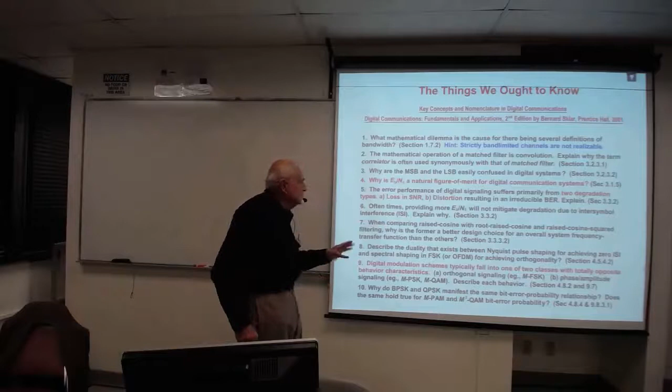Why is it that EB over N0 is a natural figure of merit for digital communication systems? Usually we talk signal-to-noise ratio. What's this EB over N0? Notice that the error performance of digital signaling falls into two clear degradation classifications. There's either some kind of noise that's going to reduce the signal-to-noise ratio, or there's going to be distortion. That's all you have to worry about, those two.

What about digital modulation schemes? Again, notice how many things fall into two compartments. There's either orthogonal signaling, an example would be M-ary FSK, or the one we're going to be talking about today, which is OFDM, or there's phase amplitude signaling. That's all there is — that's the whole bag of signaling in digital communications. And that's the sort of questions we've come up with.

Where in the system is EB over N0 located? Describe trade-off types. What about the Shannon limit — is it something we can actually achieve? There are two phases to error correcting coding: one is good, one is bad. Describe subtle energy and rate transformations — we're going to be doing that today.

As you go through all of these, down through 70, what I've come to the conclusion is that being familiar with these items on this 6-page checklist will, in my opinion, put you on the road to success in this chosen field, which I think is a fantastic, amazing field to be in. Therefore, I offer this to you as a tool to calibrate yourself.

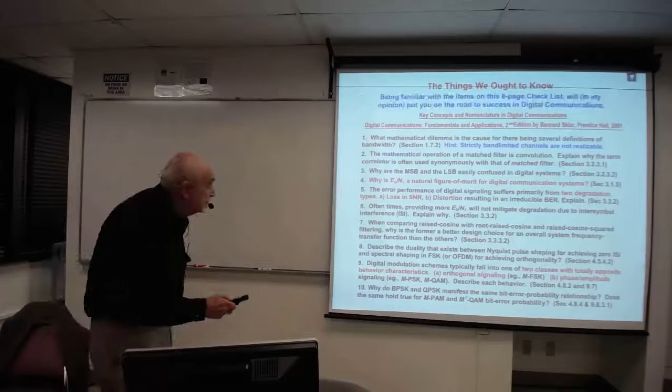Take these 6 pages, and I feel confident that if you're ever going to go on an interview for a job or such, if you can answer all of those 70 questions and are familiar with those concepts — notice that after each one I generally put a section coming out of my textbook wherein you'll find more information. Sometimes there's a reference to a paper, but most of the time there's just a reference to the notes themselves.

So again, I think it's important for you to have such a tool. Imagine me promising you that if you go through these 70 items, taking 2 or 3 per day so it wouldn't take too long, and make sure you understand every subtlety and explanation about every statement in there, you're going to know an awful lot, a wide swath of information across the board. You'll be relatively prepared to answer what any interviewer — at least these are the ones I came up with as an interviewer over several years — might ask. So I offer it to you.

Now, the first 4 parts — remember we went through many of these fundamentals: the big picture, why digital, Nyquist and Shannon, what do they teach us, bandwidth efficiency, bandwidth limited and power limited systems, turbo and LDPC codes, and so forth — and fading channels was the last important area, and a lot of what we're doing today depends on understanding fading channels. We'll remind you a little bit as we go on. But part 5 is on OFDM and single carrier OFDM.

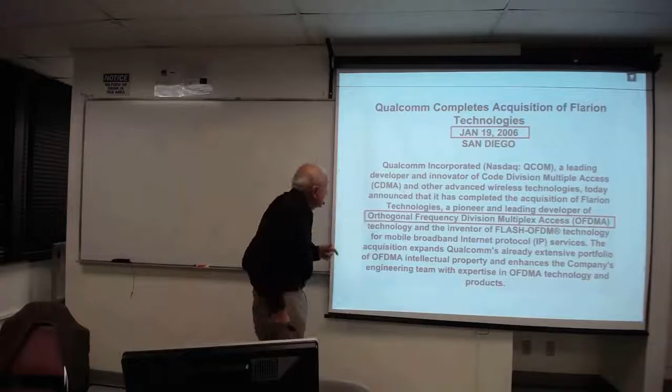Well, what made me so excited about OFDM a dozen years ago was this newspaper clipping from just about 12 years ago, when it was announced in San Diego that Qualcomm Corporation had just purchased a company called Flarion. Qualcomm basically invented CDMA in IS-95. They came up with the basic direct sequence type of modulation, which is used today all over America as the primary spread spectrum technique for mitigating against fading multipath channels.

And I thought that was wonderful, a very clever idea, the rake receiver. So if Andy Viterbi, the head of Qualcomm, went out and bought another company simply because they had a handle on orthogonal frequency division multiplexing and multiple access, then I figured this has got to be very important - and indeed it was.

For those of you who think this just came about a dozen years ago, that's not true at all. Notice that the history goes back to 1957 when Kineplex came along - these 19-inch rack-mounted panels. I want you to note that even though Kineplex was born in 1957, it was a method for sharing the channel's bandwidth. It was not a process to invert the bad effects of the channel as we use it today.

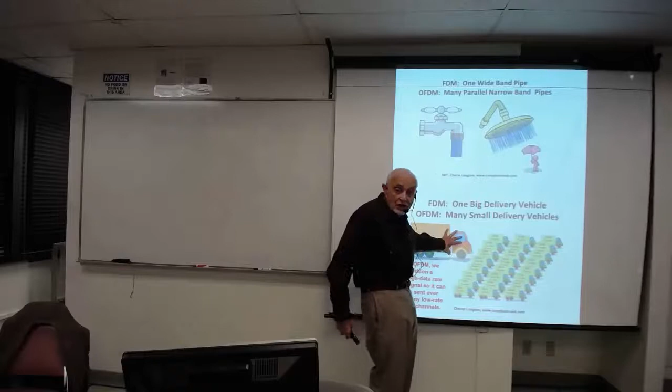You see the whole idea of the shotgun approach, as it is in OFDM or OFDMA: we're going to partition a high data rate signal so it can be sent over many low rate channels. The whole idea is if you do encounter some kind of accident along the route, and if it were one large truck, the whole cargo would go down or be delayed. Here it's just 1 or 2 or 3 - and that's why we have error correction coding.

Anyway, when you take a look at single carrier systems, if you have a wideband signal, notice you have very short symbol times - short symbols equals large bandwidth. The moment you go to a conventional multi-carrier system - this is not OFDM, this is just anybody sharing the bandwidth by giving different segments to different channels of different users - what you have are longer symbols. You're sending things out slower, a much longer time, because each transmission represents a lesser amount of bandwidth, so it's slower.

The whole beauty of OFDM, compared to a conventional system, is that in a conventional system you've got to have some spacing, some guard bands between users so they don't interfere with one another. But the O in OFDM is what gives us the magic of being able to squeeze them together so tightly, with a 50% overlap and a factor of 2 improvement immediately without doing anything else, just by insisting that they are orthogonal to one another.

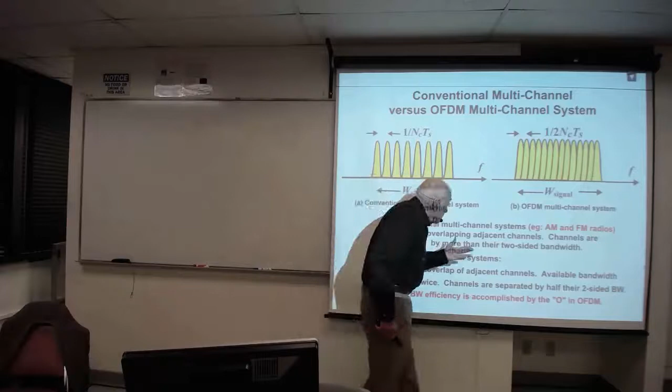So one might ask: why don't we take ordinary radio, like AM and FM, and instead of doing it this way, overlap the channels to get twice as much spectrum capability? The answer is that the simplest way to assure orthogonality of adjacent sinusoids is to have all the sinusoids have an integer number of cycles per fixed interval and constant amplitudes over that interval. That's very difficult to do in a wideband system. These are simple rules to follow when you've got low bandwidth, or just a subcarrier with a tiny bandwidth. We can follow these rules and make this happen, but it can't happen that easily in a wideband system.

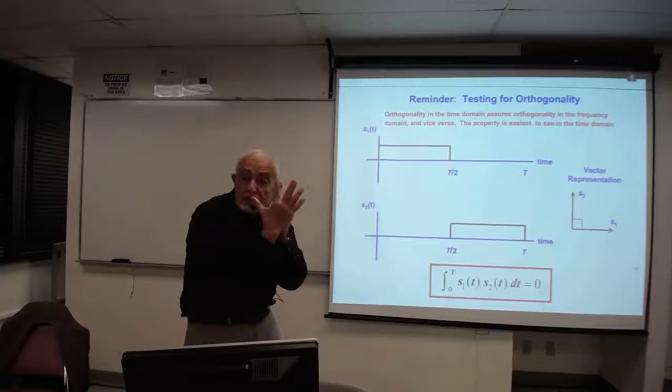This is a reminder of how we test for orthogonality. We can do it either in the time domain or the frequency domain. It's easier to see with signal 1 and signal 2. What does it mean for them to be orthogonal to one another? They can't possibly interfere with each other - they don't exist in the same time or space. Seen as vectors, they're mutually perpendicular, so there's no crosstalk - a projection of one vector upon another is zero. Mathematically, we look at the inner product averaged out over a time interval, or the correlation. You take S1 and S2, put them one on top of the other, multiply them, and average out the result - it should average to 0. That's our test.

So if I ask you: I have two tones, 10,000 hertz and 12,000 hertz - are they orthogonal to one another? If you tried to answer, you'd be incorrect even trying, because the thing you've got to know immediately is how fast you are signaling. Just saying 10,000 hertz and 12,000 hertz describes how many cycles there are in the interval. But in order for them to be orthogonal, the spacing has to be equal to the speed at which they're being delivered.

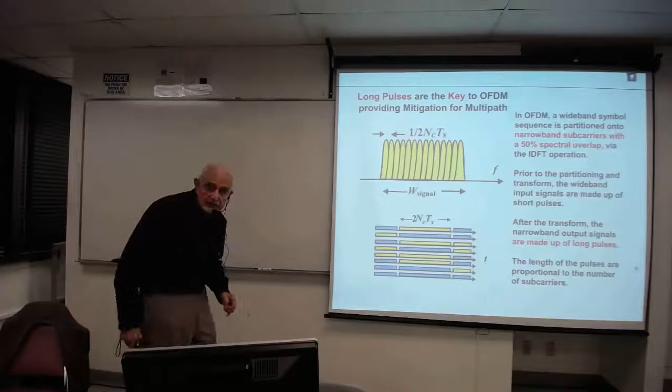Remember, this is an important point: long pulses are the key to OFDM. When we take a large bandwidth signal and partition it into lots of little subbands, we're lengthening the pulses of each one - that's the key to what we're doing. For ordinary conventional multi-channel systems, there's a bit of spacing between channels for safety. Here, there's a 50% overlap, which gives us a factor of 2 improvement in bandwidth efficiency. I can basically squeeze everything down to half and get the same bits per second as in the conventional system.

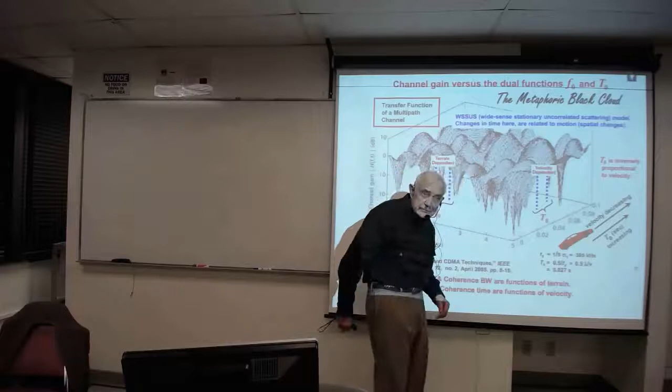You might remember what I called the metaphor of the black cloud in any fading channel - when a vehicle or pedestrian is moving along in a fading wireless communication system, they're always surrounded by this kind of overview, where the channel gain represents the quality of the channel. You get severe ups and downs in quality, and the two important characteristics we went over last time are the coherence bandwidth and the coherence time. Basically, it's not rocket science - you see the region where this thing goes up and comes down.

This region in frequency is the region of spectral lines, and signals having spectral lines in this region are going to be treated at the receiver in a highly coherent way. Let me just go over this one more time.

For f sub 0, the coherence bandwidth was this. Well, let's move on, because I have slides that describe it. But keep in mind that in a fading channel, these are two important characteristics: coherence bandwidth and coherence time.

What we're doing here is we've got a situation where the channel quality is going to suffer some ups and downs. It's not rocket science, but the region where it's up for a fair amount of time is basically telling you how much time appears to be such that the signal is being received in a coherent, reliable way.

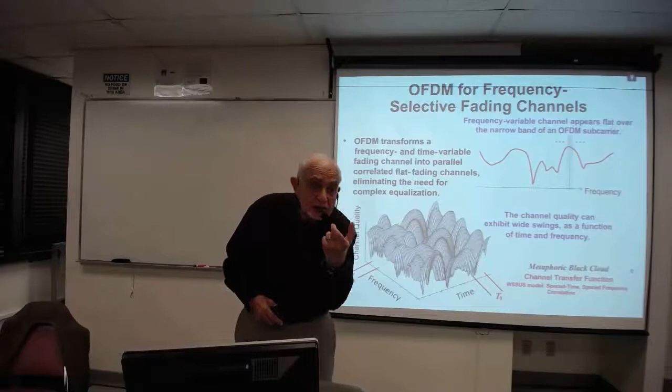And the f sub 0, similarly, when you get the same sort of region going this way in the frequency domain, you're asking the same question: what is the size, the chunk size, of the spectral region that is either fading or not fading, but behaving in a like manner—a coherent manner means a like manner.

And notice, essentially what we're going to be doing in OFDM is we're taking a slice and looking in this direction. What we're seeing is that any one of those slices is going to have an amplitude value, a quality value of that channel, which can be thought of as approximately flat.

You wouldn't think of it as flat because of this large excursion it's going through, but when we're taking little sub-channels in there, it is flat. That's why we often use the same picture that came out of the MIMO section that says it fits nicely into our assumed MIMO channel model: narrow band flat fading channels where received phasors can be described with complex value gain factors.

By the way, I think this picture also leads us to see what we're gaining with OFDM. We've got some fairly complicated transforms—that is, they look complicated to the human eye. Actually, it turns out to be the simplest mathematical way of doing these narrow band flat systems.

But what does it buy us? What is it buying us? Here's where you can see what you're buying. Look what you want to do when you say the word equalize.

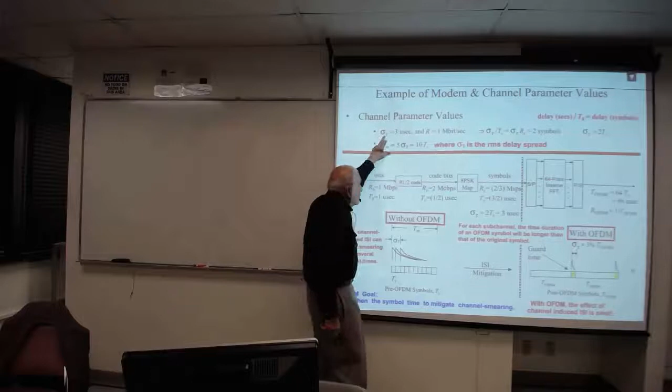Okay, so if you take a look at a modem, what we call sigma sub tau is known as the RMS delay spread, given in microseconds—3 microseconds here. Notice how easy it is to change that delay in terms of symbols: if I simply divide the RMS delay spread by the symbol time, or multiply by the rate, since sigma sub tau is in seconds and the rate is symbols per second, the seconds cancel out and I'm left with symbols. In this example, 3 microseconds is the same as 2 symbols.

Here is an example, as you see in the title, of the effect of lengthening the symbol time. That's what OFDM is all about. Without OFDM, let me walk you through an ordinary example: 1 megabit per second, and the symbol time is 1 microsecond.

You got a rate 1/2 code. You got an 8-PSK. You got symbols coming out of here, which is 1.5 microseconds, and you got this kind of RMS delay spread. So in some averaging sense, the sigma sub tau is 3 microseconds, or 2 symbols.

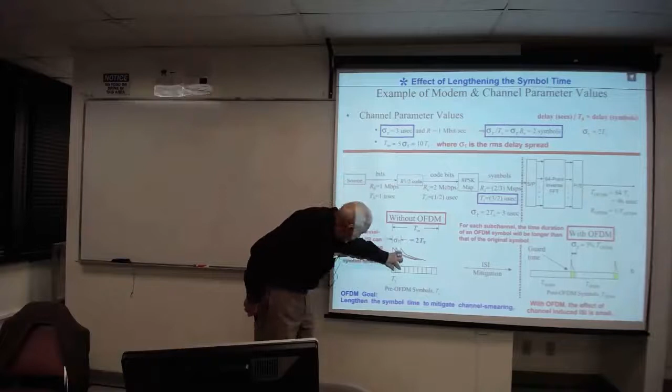And you can see here what we mean by 2 symbols. It means that in some RMS fashion, not the maximum value, because the maximum value would take you out here, but in some RMS fashion, this is about how you affect the received sequence of symbols, 2 of them.

But look at what happens once you go into an OFDM. With OFDM, when you have lengthened, that's the whole idea, you've lengthened the symbols. They're no longer this, but you got the same environment, you got the same multipath environment, so you got the same sigma sub tau, and lo and behold, this is the bottom line of what we're trying to show you.

With the lengthened symbols, the same sigma sub tau that without OFDM would have hit 2 of the symbols is only hitting 3% of 1 of the symbols.

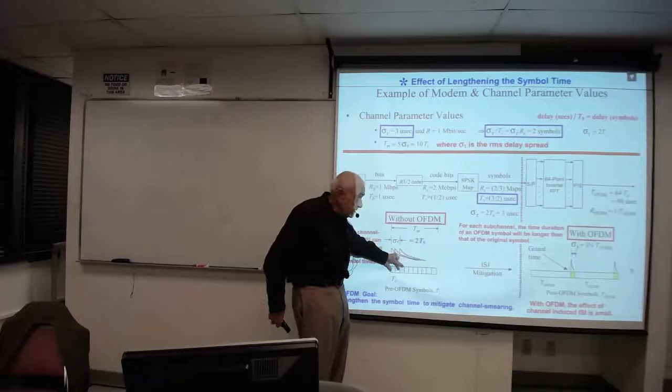So the whole idea is to just get an appreciation of this. This is almost like a wipeout, or a very difficult equalization, in a non-OFDM case. And here you just got, listen, the worst case is just leave a space, and you've already fixed that problem. So this is the big picture about how OFDM and its lengthening helps us out.

So I do want to say a little bit more about the coherence bandwidth and the coherence time, and its relationship to the RMS delay spread.

Notice there are 2 researchers. A very early one is a very famous researcher in cellular telephony, W.C.Y. Lee. His publication in 1989 gave rise to what we call a coherence bandwidth, which is called a 90% coherence bandwidth, and it's very restrictive. But Rappaport came up with a less restrictive one called 50%, and that's the one you see here.

So to get an understanding of what this means, and this is where we're focusing our attention, but if you don't happen to remember what the coherence bandwidth is all about, let me show you that. First of all, our picture is from the Proakis textbook, where we're looking at 1, 2, 3, 4 correlation functions.

This is called the spaced frequency correlation function, and what that really means is when you take, you're looking for the effect of the channel on the spacing delta F.

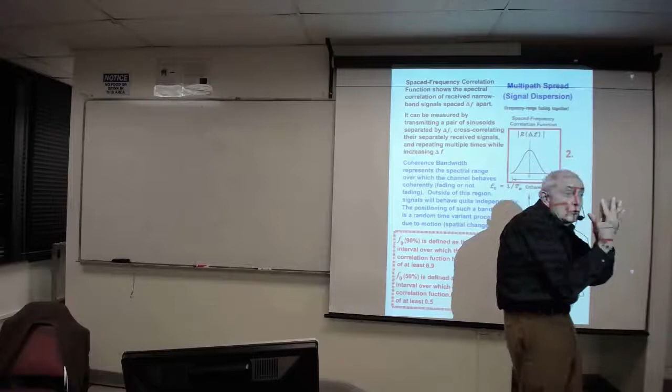And Mr. Lee said, you know, to get an important coherence bandwidth, you ought to use 0.9 or 90% as the metric. And Rappaport says that's a little too restrictive. Let's use 0.5, and let's call that correlated. So his coherence bandwidth is dependent on a less rigid correlation.

So again, you're saying, look, if there is zero difference in delta F between the two tones, you get the peak value. When delta F goes a little bit positive or a little bit negative, you get a reduced value. A little bit more, and it's reduced still more, and so forth. And so you see, as you're separating in frequency, 1,000 versus 5,000 hertz, 1,000 versus 10,000 hertz, 1,000 versus 20,000 hertz, that's how you plot that curve.

And of course, this happens to be the Fourier transform of what we call a multipath spread. And that's probably what you're used to thinking about the moment you hear multipath, is you get fingers of return that are echoes that are delayed. And these two are Fourier transforms of one another. And of course, we're focusing our attention right here on F sub 0, and I've just explained what that means.

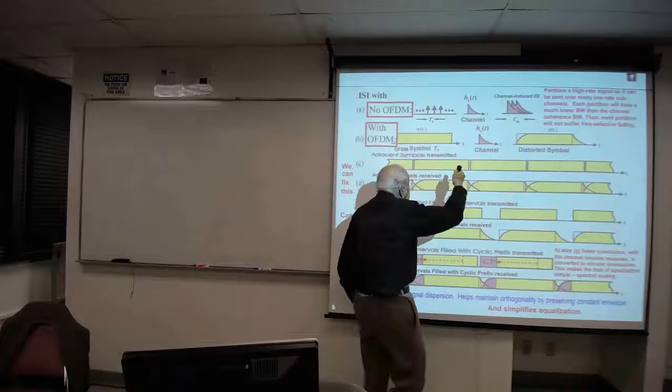So on this slide, what you see is, let's take a case of the kind of inter-symbol interference you're going to get with no OFDM and with OFDM. So if you have no OFDM and you just have symbols coming along, which I'm showing as impulses right here, the impulse response of the channel is hurtful.

I mean, it's something that is going to smear. That is, every time you're making a transmission, you're convolving it with this response, and sending out three impulses at the receiver looks like this. And of course, the receiver doesn't know the anatomy of all this.

It just gets the superposition of all that value, which is a smear. Smearing is hurtful. But notice with OFDM, the whole idea is that instead of having all these smeared signals run on top of each other, you do get a distorted symbol. There's a rise time here and a fall time here.

But we can fix that, and notice how simple it is to fix. We just take the transmissions of these - remember, these are longer pulses now. That's what we're buying with OFDM: longer pulses, with a little space or zero space between them.

But look at how we fix it. We just separate them with a guard band, and you see that the distorted part falls in the guard band, and we have just fixed the inter-symbol interference.

But we're going to go further than that. We introduce what is called a cyclic prefix, and that fixes things further. I don't have to fix the inter-symbol interference any further than that - once I've opened it up so they don't sit on each other, it's gone.

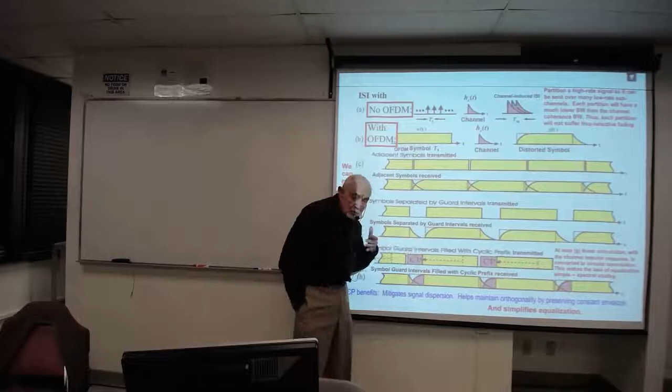The cyclic prefix really doesn't do much for the inter-symbol interference, but we're going to show you how much it does for maintaining orthogonality. So the interval fixes ISI, but it's the cyclic prefix that fixes ICI, which is intercarrier interference.

So let me give you a quick preview. Remember I said there are just a couple of pictures that are going to drive the whole thing home, and this is one of them.

My son did this, and he's always telling me, don't talk about me in your classes, but I always do, because I'm proud of him. He came up with a picture which I think is very intuitive about understanding the formation of what's happening.

And what I'm forming out here is a series of time points, and this is the output here. If I told you this came from the superposition of subcarriers, it's hard to see just by looking at these points. So this is what my son came up with, and I think it's very useful.

First of all, you've got a source of data. Most of the time, the data is going to be from some amplitude phase modulation, such as QAM, which is the preferred modulation in this case. But we're going to take a very simple one, BPSK.

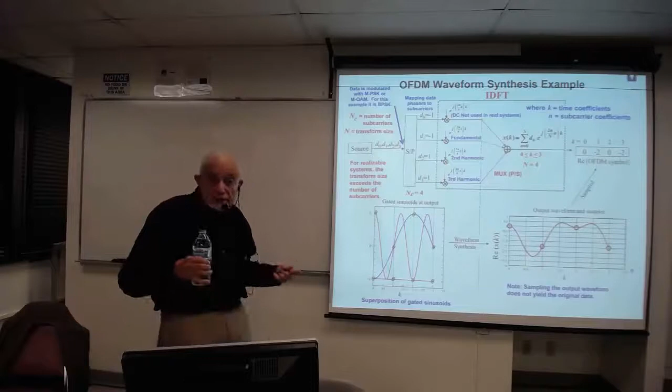IDFT and IFFT in my notes are used interchangeably. It's wrong, because IFFT or FFT is a way to implement a mathematical transformation. But the transformation is what we want, and that's IDFT or DFT - a transformation.

So in this case, notice what we're doing: we've got these 4 wires, they contain 4 phasors. Think of us being in the frequency domain with phasors, and that's why the transform we're going through is an inverse transform - we're going in with frequency models and coming out with a time domain.

And so notice what we're doing: we're essentially multiplying by - notice N stands for subcarrier coefficients. So the coefficients N go from 0, 1, 2, 3, and you can think of 0 as DC. By the way, the DC is never used in real systems, for reasons we'll talk about.

But let's count it in anyway, because we have to count that as one of the portions of our bandwidth. When n is 1, that's the fundamental. When n is 2, that basis function is moving twice as fast. When n is 3, that's the third harmonic, moving 3 times as fast.

So look at what happens on every one of these wires: the red wire, the blue wire, the green, and the purple. And that's what you see here. First of all, the red wire is the DC, so that's this line down here at -1. There is the DC level. And then the fundamental is the

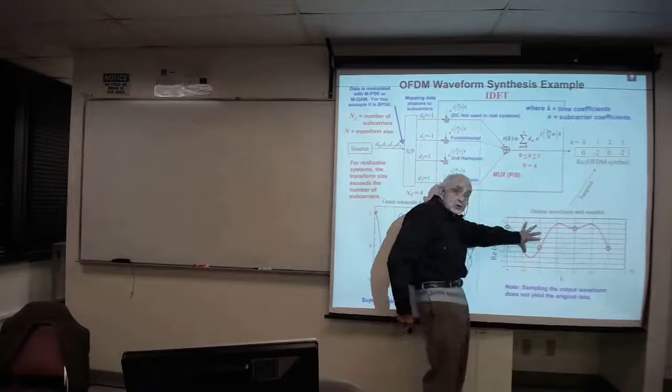So again, what this important device does is how we synthesize this output waveform. And you couldn't guess, could you, that this waveform you're looking at right here represents time samples of 4 FDM frequency division multiplexed pieces of data that are carrying 4 pieces of messages on them. You couldn't guess that, but it's easier to see here that each one of those sinusoids, even the DC, the fundamental, the second harmonic and the third harmonic, are each carrying data on them. Now you can see that data, but when you superposition them and add them up, you just get points.

So notice the first thing that's different about OFDM: when we get to single carrier OFDM, you'll see that you can actually sample the output and get your original data. Not possible here, because there's no way that the simple collection of those points can reveal what the message was originally. You basically have to go through the transformation. If there was an inverse DFT that created this, it's going to take a DFT to be able to receive them.

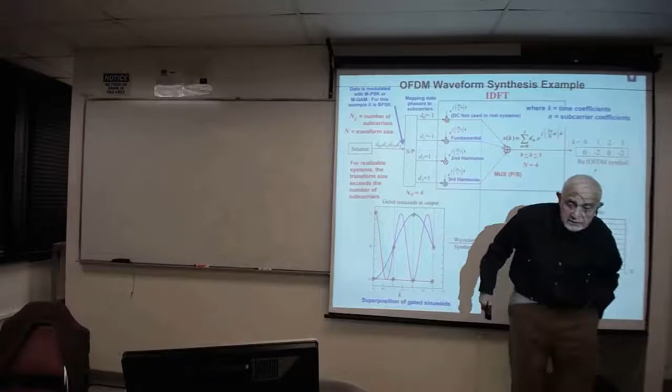So again, there are nice pictures having to do with these formations. You've got basically a slab of frequency. In this case, the big bandwidth was 60 kilohertz. Again, you have 4 subcarriers in this place. By the way, in general, in this example, you have both a transform of 4 and the number of subcarriers are 4, but that's not usually the case.

The transform size is always going to be larger because it allows for putting in some null positions in frequency, which expands the frequency and makes for an easier filtering job. But as far as explanations are concerned, it doesn't modify anything if we make them equal. So whether it's transform size or subcarriers here, we can think of there being 4 subcarriers. You've got a total of 60 kilohertz as the total bandwidth. You've partitioned it up into regions of 15 kilohertz each, and out comes this superposition of sinusoids that we talked about.

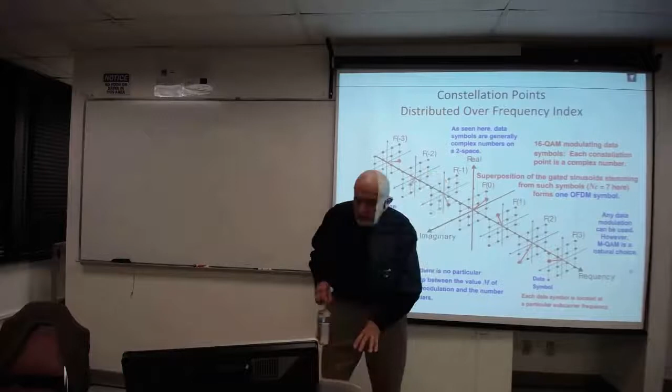Now here's just another example where we have taken, we've got 7 gated sinusoids stemming from such symbols. NC equals 7 here forms one OFDM symbol. So notice that when we are talking about an OFDM symbol, this is what we're looking at. This is one OFDM symbol. Think of time as running this way, and frequency running this way, and there is zero frequency here, with positive and negative frequency.

What I've shown plotted here is the data constellation, because at each subcarrier, positive and negative independently are sending pieces of data which represents a phasor, a magnitude and an angle from this constellation - in this case, a 16-ary QAM.

Now to show you what it looks like in time, again I've plotted exactly what we had before. This is one such symbol consisting of 7 subcarriers, including the DC, and time is running on this axis, sending an OFDM symbol at each time.

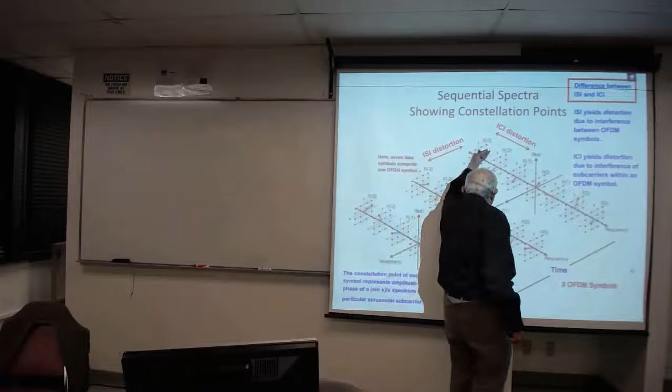If I do not lose orthogonality, I do not have any distortion. Remember, think of orthogonality as perfectly perpendicular - that's a good geometric analogy. Projection of one axis on the other is zero projection. If you don't lose orthogonality, forget about having any ICI distortion.

So we've just explained that, and we've pointed out that the guard interval alone mitigates the ISI. Just having that space is what does it. We don't have to fill it up with anything, and we've still mitigated the ISI. But by filling it up with a cyclic prefix - and we haven't really proven it to you yet, but it's coming - we'll show you what that cyclic prefix does for us to maintain orthogonality.

Now, in my opinion, this picture - I can't tell you how many times students who get all confused about OFDM... it's very creative. Obviously, the mathematical backgrounds to make OFDM work came from some very astute ideas. Mathematicians are very interesting people - lots of them don't have a close handle on what it takes to actually turn it into hardware and apply it in the system.

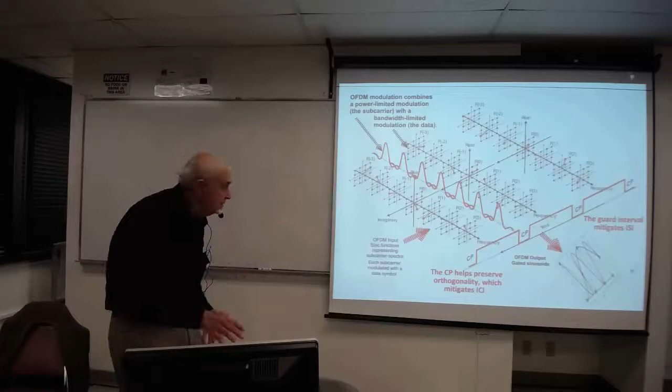Notice the kind of modulation that we use for the data - if you remember from some of the earlier talks, that kind of modulation is what we call bandwidth limited modulation. Anyone who's bandwidth limited wants modulation on a plane like this, because bandwidth is just a function of signaling speed for that kind of modulation. That's all it depends upon - how fast am I signaling?

So look at what I can do when it comes to trying to exploit better and better bandwidth efficiency. Instead of having 16, I can make it 64-ary QAM - that's 6 bits instead of 4 bits. Let's make it 128 QAM, 256, 1024 - more and more bits in there, and bandwidth is not affected. Bandwidth only depends upon how fast you're signaling. That's all it depends upon.

So am I getting something for nothing? Remember what's happening if I take these 16 points and, without increasing this space, just put a point in between and make the 16 into 32 - I got twice the bandwidth efficiency. But what am I vulnerable to if I just put more points in there? Double them, triple them, quadruple them, and just shove them in here.

I'm vulnerable to them, or those points are more vulnerable to being misconstrued because of the noise. So I basically have to separate them. I have to make this whole plane larger, which means I have to make the signal-to-noise ratio larger. So the price I pay is signal-to-noise ratio, or power.

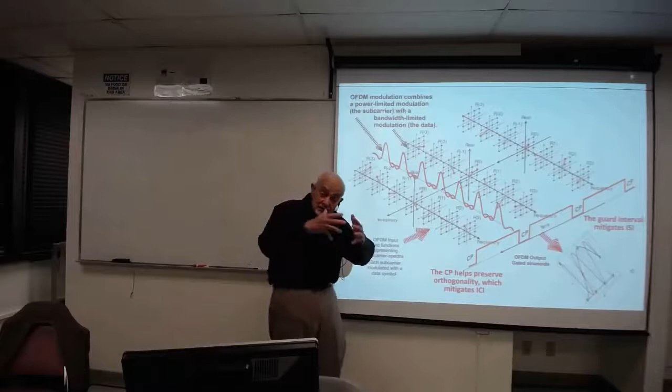So again, please be aware that OFDM has two kinds of modulations. It has an FSK, frequency tones, subcarriers, that have already been described to you as power limited. And here it's being modulated with the data that's bandwidth limited. So bandwidth limited data is going to dictate an amplitude and a phase of this sinc function, which is describing the coefficients of the sinusoid to be built.

Each data symbol, here's a data symbol, or constellation point, is, in other words, this little phasor, or this little phasor, or this little phasor. Notice this one is going to be a very small magnitude. This one is the largest magnitude over here. So the amplitude or magnitude is going to be changing, and the angle is going to be changing.

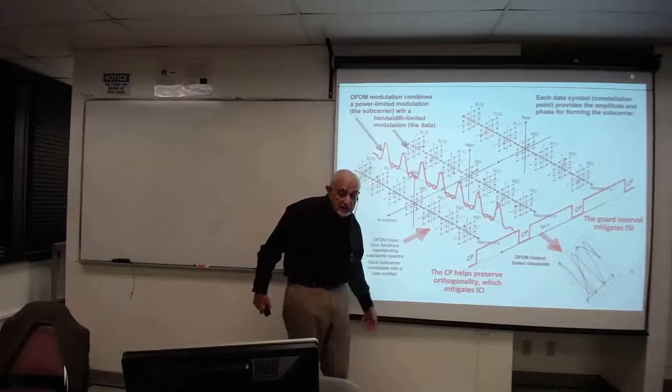So you see, each data symbol provides the amplitude and phase for forming the subcarrier. The subcarriers are sitting at certain frequencies, but again, the rest of the knowledge needed to build that sinusoid, its amplitude and phase, is provided by the data.

Okay, so remember also that for clarity, we didn't overlap these sinc functions representing the subcarriers, but they would overlap in practice, it would be a little too busy a picture, but it would be. And notice that the use of cyclic prefix costs time and energy and lowers the data rate and lowers the bandwidth efficiency, but use of the cyclic prefix does not affect the bandwidth at all.

The bandwidth is computed, well, I'll show you later, but right over here, this is the bandwidth computation. Let's see, right in here, we just measure. Remember, we have N sub C subcarriers. We have a delta frequency between them, delta F, just the product of those two numbers. The quantity of subcarriers, in this case 7, multiplied, or maybe it's 7 plus 1 we would use, N sub C plus 1, so that we can get a bandwidth that goes like 50% beyond here, 50% beyond here, multiplied by delta F.

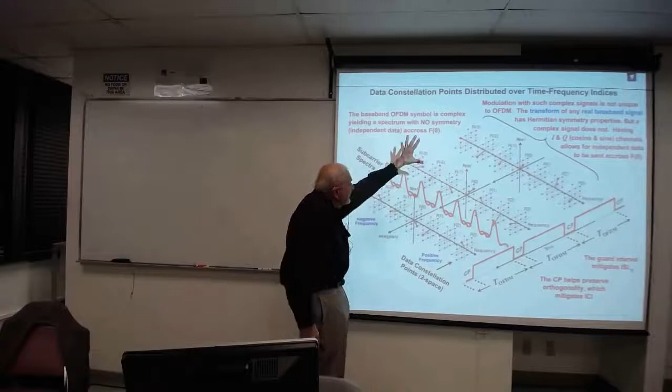Okay, let's see what we're saying. So remember, we got positive frequency, we got negative frequency, and modulation with such complex signals is not unique to OFDM. The transform of any real baseband signal has what is known as Hermitian symmetry properties, but a complex signal does not have any even or odd Hermitian symmetry. Having I and Q, cosine and sine channels, basically allows us for independent data to be sent.

Did you realize that when you look at ordinary frequency modulation, what you're looking at around the zero axis are the positive and negative of exactly the same information. The positive and negative, exactly the same message. Positive and negative, exactly the same message.

In ordinary telephony, when they sent analog signals over cables, remember, they wouldn't send two-sided spectra. They'd send single-sided spectra in order to save bandwidth for efficiency purposes. So we're not quite used to saying, on either side of the frequency, positive and negative, we have independent data now, not just a mirror image of the same data.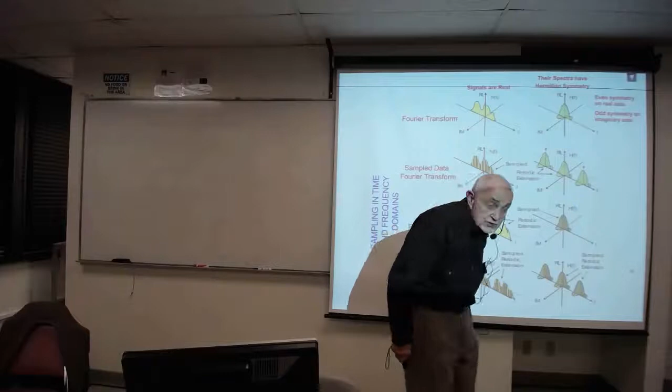But everything that is on the imaginary axis has odd symmetry. That is, they're symmetrical, but with a change in sign, as you see over here. Now, when we go to sampled data, which is the one we're interested in mostly in our business, what you see is that you basically have analog type replications.

So sampled data transformed gives you analog replications, all with the same Hermitian symmetry that we just talked about. Notice what the job of the DFT at the receiver is going to be: to take these analog replications and essentially give us samples in their place. I'll let you read all the details on your own, but even symmetry on

the real axis and odd symmetry on the imaginary axis, as described here, is a real signal. If you're looking at a signal that has been multiplied by J, that is an imaginary signal, it has what is called odd symmetry, that is, it has even symmetry on the imaginary axis and odd on the real axis. And when you take a real signal, remember, we're looking at the frequency domain, not the time domain.

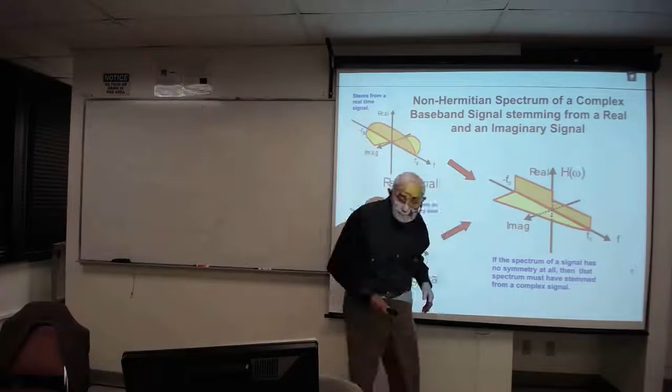And that's the ability that gives us the ability to put independent data on the positive and negative axis. So notice when you're looking at baseband, there's no symmetry at all. So how do you actually transmit a signal like this, a baseband signal like this?

Because the moment you put it on - let's relate what that means exactly. I mean, you can have a signal like this, a baseband signal like this, but it just means that as a real signal, you can't send it on one wire or one antenna. It's basically got to be sent in two parts, a real and an imaginary part.

But notice how by creating a bandpass signal, and that is just upshifting it up and down, then the complex baseband time signal is modulated onto a carrier, real part onto the cosine, imaginary part onto the sine, thereby producing a real waveform.

So this bandpass is symmetrical about zero, but has no symmetry around the carrier F sub c or minus F sub c. No symmetry at all here, no symmetry along here, but as a bandpass signal, it has perfect Hermitian symmetry. Real has even symmetry, imaginary has odd symmetry, and again it represents a transmission that can be made over one wire or one antenna.

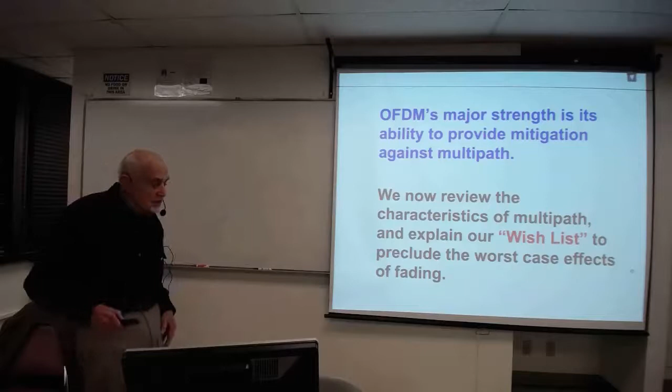came up with a wish list. And that wish list doesn't fix anything necessarily, but it gets us started. It keeps us away from the absolutely worst case type of multipath. So this is that Proakis source that I borrowed from heavily in characterizing, because I don't think there was anyone better than Proakis's book. That's how I learned everything I know about multipath, and this picture said it all to me.

And again, notice what this picture is all about. It is the essence of understanding multipath channels. What you have as we go around the circle 1, 2, 3, and 4 are what we think of as various correlation functions. In fact, we can draw a line right over here and talk about this as being the multipath spread, and notice I'll ask the question later on, what determines how this changes?

Can we do anything in our system to make these dying-out power received echoes any different? And its Fourier transform, the spaced-frequency correlation function, which we showed you how we were going to make measurements by sending out different tones spaced delta F apart and seeing how well they're correlated.

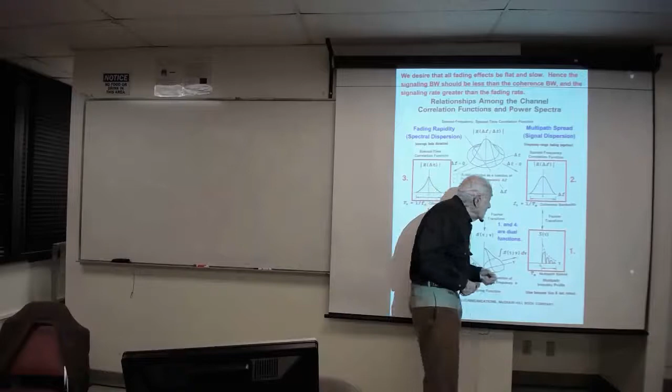Here, I basically send the same sinusoid at T1 and T2, then repeat it again at T1 and T3, T1 and T4, and view how well they're correlated as I make delta T, the time between those two transmissions, bigger and bigger. Remember what I'm looking for: independently receiving each of these transmissions with a complex receiver, amplitude and phase, and asking how well do they correlate.

These are both correlation functions, so they're duals of one another. This one is a correlation function of sending out different tones. This one is a correlation function of sending out the same tone at different times. As the time increases, as the frequency increases—notice what we would like.

What would we like? We'd like this correlation function to be just a flat line, or we'd like the coherence bandwidth to cover the world, so that regardless of the terrain, we get an accurate picture of what's coming in.

Here too, what we'd like is for the coherence time to be as large as possible. Can we change anything in the system to make this different? No. The fading rapidity depends upon the speed at which this moving, mobile system is going.

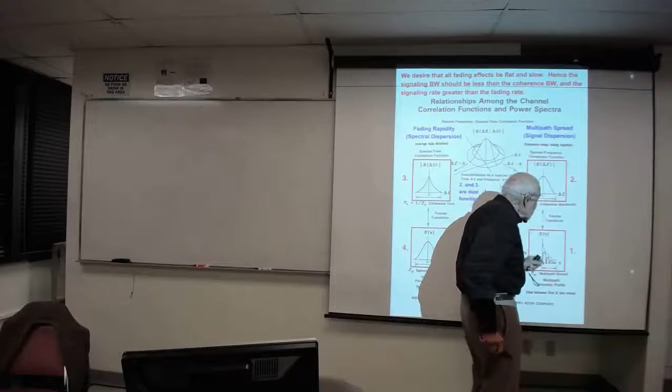The whole idea is that as we move through this general terrain, there are going to be ups and downs, which I showed you as this metaphoric black cloud in both delta F and delta T. And what we want is for the bandwidth of our signal to fall well within this coherence bandwidth.

You see what that means? Why this is a good starting point to say I want my signal bandwidth to fall well within here: it means that every one of these spectral lines are going to be treated in a like manner. The quality or the gain of the channel is not going to affect them differently—they're going to be treated in a like manner.

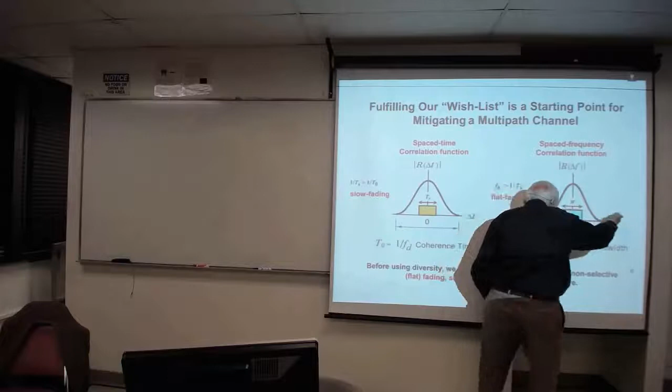And if I had a bandwidth which was way out here, then only some of the spectral lines of my signal would be treated in this like manner, and outside of this region they'd be treated quite independently. There's the essence of distortion: when a signal's spectral lines have such and such gain, and other spectral lines have a different gain, I'm distorted.

So this flat fading is our starting position for OFDM. I don't want to do anything before this—I don't want to try to use any diversity before I get here.

And slow fading also. Remember, in the world of fading, I have a slide called The Good, the Bad, and the Awful. And it looks like this.

It basically says, on a probability of bit error curve versus EB over N0, I'm basically going to get the good—that's AWGN type performance, Gaussian noise. The bad turns into an inverse linear function, and the awful is a bottoming out that looks like this. So the good, the bad, and the awful—we're saying the starting point should at least try to move the awful down to something which is merely bad, an inverse linear one, as our starting point.

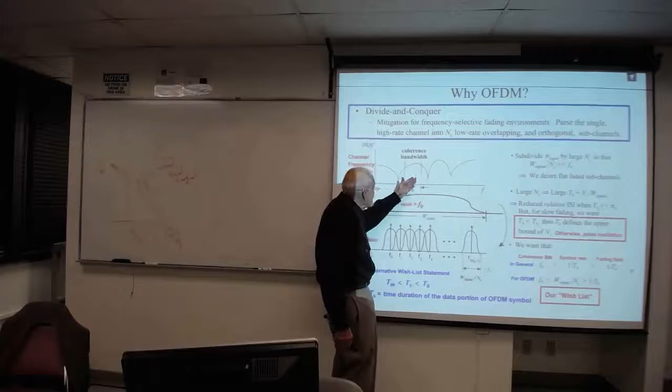If this is the channel coherence bandwidth, and this is our signal, which is larger than f sub 0, we said only some of the spectral lines are going to be nicely behaved within here, and outside of that region, they're going to be behaving quite independently.

So what I do is partition, this is the mitigation technique of OFDM, you partition your large bandwidth signal into lots of small bandwidth onto subcarriers.

And we're, see, in general, this is our going in position, which I call the wish list. The wish list gets us from here. It's not an all over fix. It gets us from here to here. It gets us from awful to merely bad.

That is, I want the symbol time. Taking the reciprocal of the symbol time is like taking the bandwidth of the signal, or the symbol rate. And I want f sub 0 to be larger. See, here it's smaller. But I want f sub 0 to be larger than the symbol rate, which in turn should be larger than the fading rate. This is my going in position.

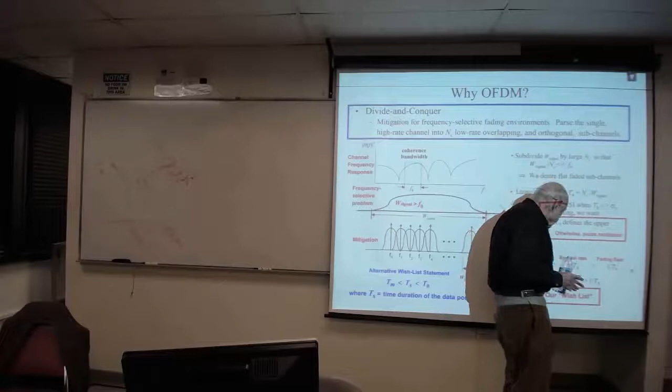Notice how it changes for OFDM. The only thing that changes is that the signaling rate, which is like W signal, before OFDM and after OFDM, it's just been divided through by the number of subcarriers, so it's W signal divided by the number of subcarriers.

So, of course, we desire flat faded subchannels. You saw this before. Again, this is terrain dependent upon where you are exactly, and velocity dependent, how fast you're moving. Doing this is going to preclude having to worry about frequency selective and fast fading.

So let's see. If I ask the question, how large should n sub c be? What range should the number of subcarriers fall in? Well, here's our starting point, our wish list: f sub 0 to be greater than the signaling speed in OFDM.

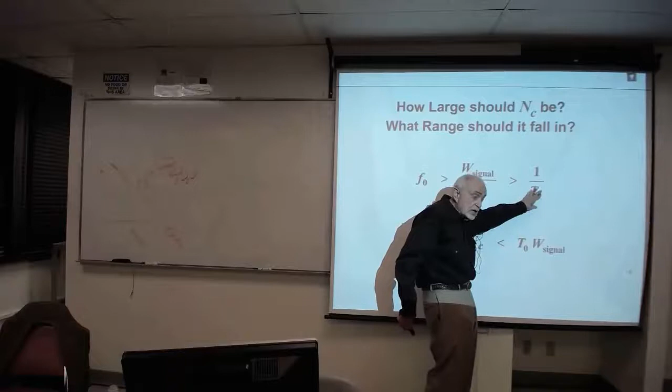We just showed you how this is the signaling speed, which, if this is T sub 0, the coherence time, the reciprocal of the coherence time is basically the rate at which you're going in and out of those times, or the fading rate is another name. So notice how this term has lots of names. You can call it the fading bandwidth or the fading rate.

So look at what I've done. I've just done a little bit of algebra. Remember, I've taken the reciprocal of everything. Now, the moment I reciprocate it, the greater than signs become less than signs, and the rest is just algebra. But that algebra has allowed me to place n sub c here to find the minimum and the maximum n sub c.

And so now let's take an example. Assume a wireless channel with an RMS delay spread equal to 5 microseconds and a coherence time of 50 microseconds, and if the transmission bandwidth is 20 megahertz, find the minimum and maximum number of OFDM subcarriers needed in order to ensure flat fading and slow fading effects, to get us into a good starting position.

Okay, so here's our general wish list that we pointed out, that our signaling speed should be less than f sub 0 but should be greater than the fading rate. And with OFDM, all that we've changed is this middle term because we've got all these subcarriers and we've rearranged it, and now we're going to solve for n sub c because, after all, we have this information.

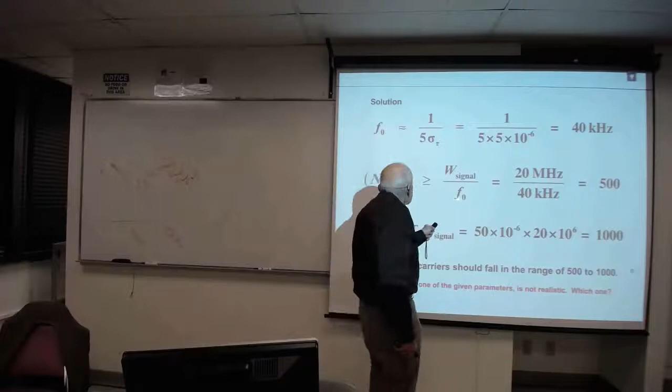So 20 megahertz over 40 kilohertz is 500. That gives me the minimum. At least in order for my signaling, in this case, to be at a rate which is less than the coherence bandwidth, I've got to reduce the bandwidth of each one such that it takes 500 subcarriers for such a reduction.

Now let's get the maximum. The maximum says that n sub c has got to be less than, and this is where we use this number, which was very small. It's over in a blip, and multiplied by, it tells me 1,000.

Well, you know, it gives me a nice range. If I were just doing this as an abstract problem, I might not realize by these answers that something is a little wrong. So the number of subcarriers should fall in the range 500 to 1,000.

That's fine. And I'm telling you that one of them is unrealistic, and I've already revealed it's the coherence time that is that short. So the coherence time is not really realistic.

Let us show you what the velocity implies. To get a short coherence time, something's got to be moving, and it's got to be moving pretty fast. It can be anything - one of those two platforms, or traffic in between. Something's got to be moving fast.

So let's take an arbitrary frequency, a nice round number, easy to work with, just to give us a number to play with. 300 megahertz is the carrier frequency. Then the wavelength is the speed of light, 3 times 10 to the 8 meters per second, divided by 300 megahertz. And the answer is lambda is 1 meter.

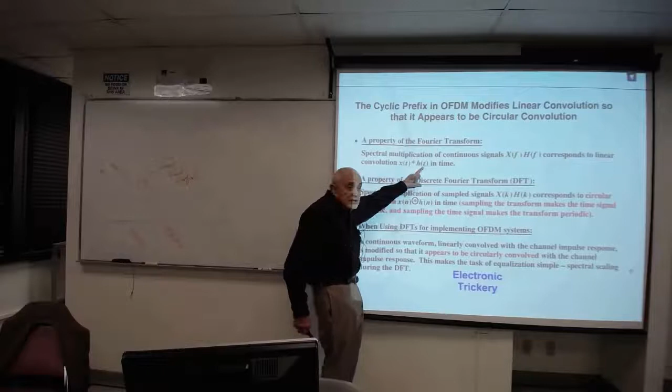So a property of the Fourier transform is that the spectral multiplication of the frequency domain characteristic of signals spectra, capital X of frequency, H of frequency - these are now continuous signals, not discrete - corresponds to linear convolution of the waveform X of t with, think of this as impulse response, H of t in time.

But if I had to notice a property of discrete Fourier transforms - this is just the mathematics associated with a discrete transform - spectral multiplication of the sampled signals X of k, H of k corresponds to circular convolution in time. And what that really means, this word doesn't mean much to you, but what that means is sampling the transform makes the time signal periodic.

And that's what we pointed out here. Right over here, we said when we take samples, we get replicate copies of these continuous spectral pictures, having a real and imaginary part, and having Hermitian symmetry because this was a real signal.

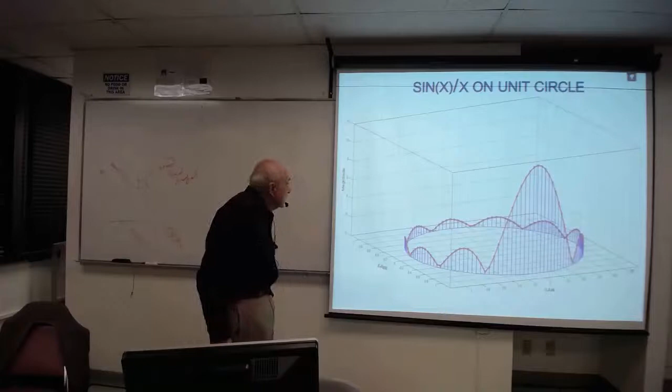And lo and behold, what the task of the DFT - you do have a continuous transform here, but the task of the DFT is to form samples from that continuous spectrum. So when you take a look at a sin x over x type of plot, usually you see it on an axis that's either plotted out in time or frequency, but plotting it on a unit circle is a useful idea. That is, it's useful for this reason.

Sampling the time signal makes the spectral transform periodic, and if it's periodic, which is easily seen on a unit circle, the transform must have stemmed from discrete samples.

The reason it's easily seen is because the start equals the finish. Call this point corresponds to 0 here, the point where it's starting, and time is going off this way, continuing and coming around. Imagine plotting it on a straight line and circularizing it. In order for this not to give you a discontinuity, it's got to be smooth, it's got to be equal. Plotting it this way where the start and the finish intercept at the same point, you can see that going around multiple times on the circle is what dictates periodicity.

So the general circular plot is one that makes it easy to see that the thing is periodic.

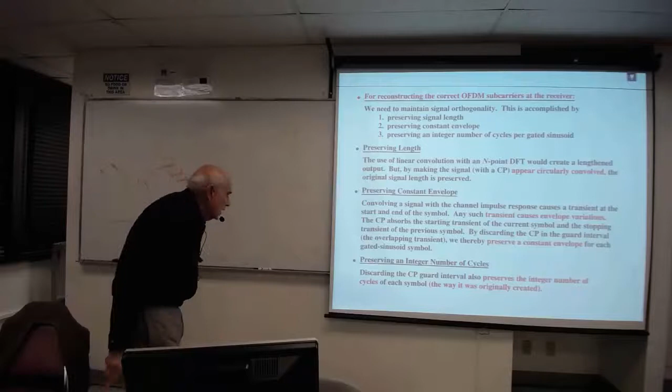So these are the rules that the cyclic prefix is going to adhere to, that's going to give us the benefit of getting this transmission to look like it's going through a circular convolution when you send something off that is going to be operated on by the impulse response of the channel. As your signal goes through the channel, you think of it as convolving with the impulse response of the channel.

And there's no such thing as circular convolution in nature. You can't send something off in time and then guarantee that you grab the beginning and put it back again at the end. There's no way of grabbing something that has already been sent out. So in nature, there's nothing that resembles circular convolution, but we're going to trick that. Remember, we said we got some electronic trickery that's going to make it look that way. And that's what the cyclic prefix does. The cyclic prefix is a little trickery.

So this is what we have to do to maintain orthogonality. Three things: first, preserve the signal length. Ordinary linear convolution, if you remember, you take two things and slide them together, you get a longer output. We need to preserve the length in order for it to maintain orthogonality.

Number two, preserve the constant envelope. I'll show you little MATLAB examples I ran, that if you have any kind of attenuation in the signal that you didn't count on, you've lost orthogonality when you try to convolve these things. And third, preserve an integer number of cycles per gated sinusoid interval.

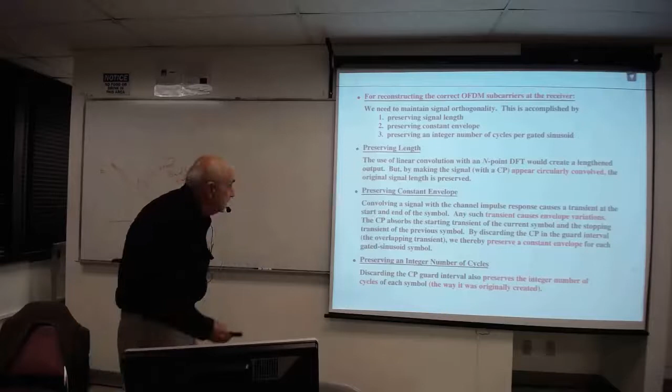If these three rules are observed, OFDM signals will experience no losses in orthogonality, and we showed you about that as a reminder. I have here just some examples I've run of what we think of as inner product multiplication integration, or in other words, a correlation point.

If you take a 3-cycle and a 4-cycle interval, with an equal number of cycles, exactly 3 and exactly 4, and you just do product summation and look at the output at the very end, it's 0. You do the same thing by taking the cosine with the cosine, and the cosine with the sine. You get a little different look on it, but again you get a 0 out.

Now if you do the same thing all over again with what is called a tilted cosine representing your signal, in other words, it's gone through some envelope distortion, and that's one of the requirements for you not to lose orthogonality, is to not have any envelope distortion. You go through the same thing here, and you get something that is not 0 on both of these.

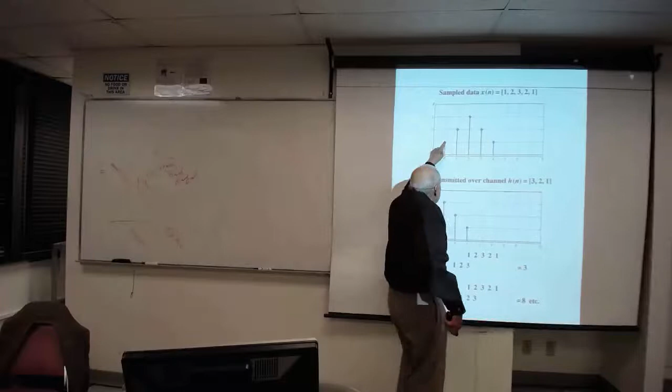Here is a sampled data sequence: 1 unit in amplitude, 2, 3, back to 2, back to 1. That's 1, 2, 3, 4, 5 samples of data. Let us say the impulse response of the channel in terms of discrete samples looks like this: a typical curve that simply attenuates in this exponential manner, 3 followed by 2 followed by 1.

Let's convolve this sequence with the impulse response of the channel using ordinary linear convolution. So I take 3, 2, 1 — with ordinary convolution, one of them gets turned around. So let's turn this around to 1, 2, 3, and then move them in and do multiply and add. 1 times 3, there's nothing to add it to, so it's just 3. Then move it in 1. Now 2 times 3 is 6, and you add it to the next multiple of 2, so 6 plus 2 yields 8, and so forth.

If you follow that completely, this is the output. The first thing you see is that we've not preserved the length, because the original data was 5 units long. Here it is 7 units long. So the original 5 data samples have grown to 7.

What would a circularly convolved version look like? Here is the impulse response again, 3, 2, 1, and if I turn it around, call it h of minus n — so this is 0, this is minus 1 and minus 2, turned around at 0. And notice what I'm about to do: I'm going to plot it on a circle rather than on a straight line, following these index numbers, which are now data time index numbers.

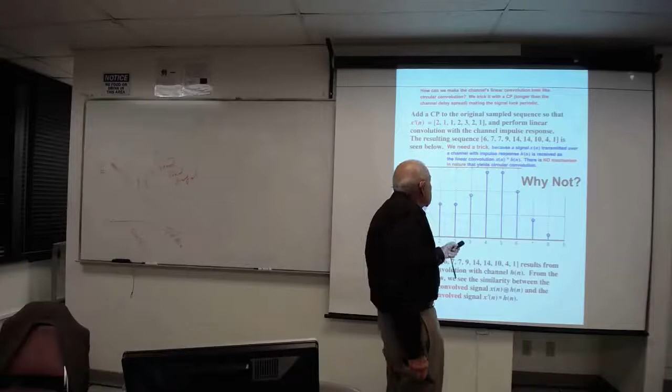First of all, we need a trick, because the signal transmitted over a channel with an impulse response like this is received as a linear convolution. There is no mechanism in nature that yields circular convolution.

Why not? Like Rudyard Kipling says, east is east and west is west, and never the twain shall meet. You send out time 1, time 2, time 3, time is time, and never the twain—you can't make early time meet late time and paste them together and show that they're the same.

There's nothing in nature that resembles circular convolution. Everything you do in the way of a radio transmission is a linear convolution.

So the trick is that this cyclic prefix is a bit of trickery that's going to make it look as if we went through a circular convolution. Because look, you saw what circular convolution did—it preserved the length. That's all you saw, and you got these numbers.

And you saw that when I did this linear convolution with this cyclic prefix, I got this out of it. But notice what I'm about to do.

Just as I showed you originally with OFDM, that part that is a cyclic prefix—which is some of the hash from the last transmission and some of the hash from the next transmission—is going to be thrown away. To the left of this red line and to the right of this little line, it's thrown away. And remember why we're doing this: to help orthogonality. What's left in the middle looks like circular convolution.

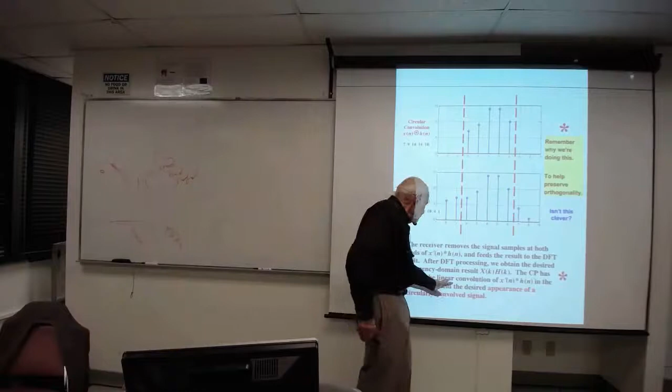The cyclic prefix has forced the linear convolution in the channel to yield the desired appearance of a circularly convolved signal. So don't you really have to hand it to the mathematicians who dreamt this up?

It seems to me that it takes a special kind of brain that has the ability to foresee what is needed to maintain orthogonality that can be done in this manner, because you want something to resemble circular convolution.

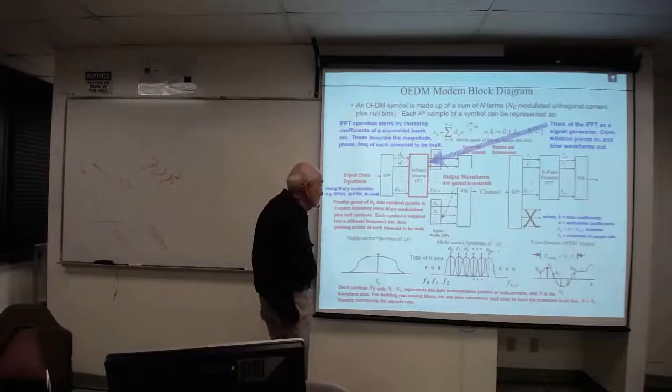It looks like a lot of hard work, but it turns out, if we get to finish this at 6:30, you're going to see that it is the easiest way to do it. That's why OFDM resembles this transform world of mathematics, and what it does is, remember, inverse FFT means frequency in and time out.

Those frequencies—and we did use BPSK in our little example—are phasors. Remember, any plane like in QAM is a natural plane to use. So the phasor we're talking about can come from a lot more diverse set than just saying 0 degrees or 180 degrees. When you're looking at a 1024 plane, you're looking at any one of 1024 of those phasors.

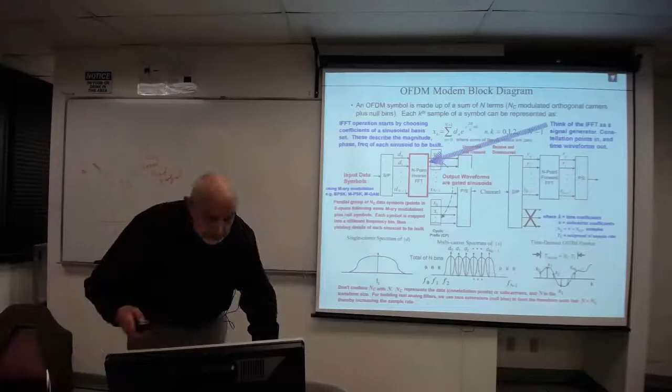We talked about this already, that this is the mathematical transformation, and this is the implementation. Excuse my sloppiness, but you see it throughout the notes, and I just didn't have the energy to change it.

Here's a little example in 802.11a, where the uplink and downlink look symmetrical, and there are some numbers that dictate immediately that the OFDM symbol time is 4 microseconds, of which the cyclic prefix is 0.8 of a microsecond, and the data portion is 3.2 microseconds.

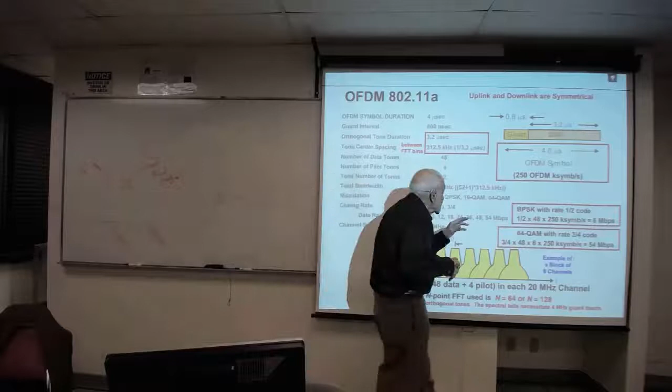In order to get what we call delta sub f, the spacing between the subcarriers, it's going to be the reciprocal of... one question you might have is, why shouldn't we take the reciprocal of the time of the OFDM symbol, the reciprocal of 4 microseconds? We don't do that. What we use here is what we call T sub s, the data symbol portion, the reciprocal of 3.2 microseconds, in order to form an orthogonal set.

The question might still be troubling, and maybe we should jump to answer that question right away. We can always jump away from it. Let's jump right to that question since we've just raised it now.

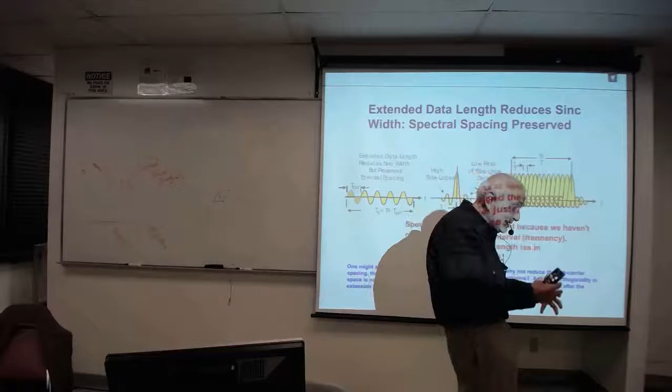One might ask, with the extended length, thereby forming a family of extended orthogonal waveforms, why not do it that way? The answer is, we don't care about it being orthogonal when it goes off in space. We want it to be orthogonal as it's being received at the receiver. So yeah, it's not orthogonal as it's flying through the air, but when it's received at the receiver and that cyclic prefix is thrown away, then you have an orthogonal set. This is an important distinction in all of OFDM: the spacing in frequency is not the reciprocal of the OFDM symbol time, it's just the reciprocal of the OFDM data portion of the symbol time. Very, very, very important.

Let's take a little example of this one that we're working on. This shows you how, in this example, the transform size can be either 64 or 128, while the number of subcarriers are 52, of which 48 are data and 4 are pilot. Remember, we said in real systems you're always going to get an N, a transform size greater than the number of subcarriers, and here it's just slightly greater than 52, or more than 100% greater than 52. It's much greater, and basically it shows you a bandwidth expansion that makes your filtering easier. If we have time, we'll come back to those slides as well.

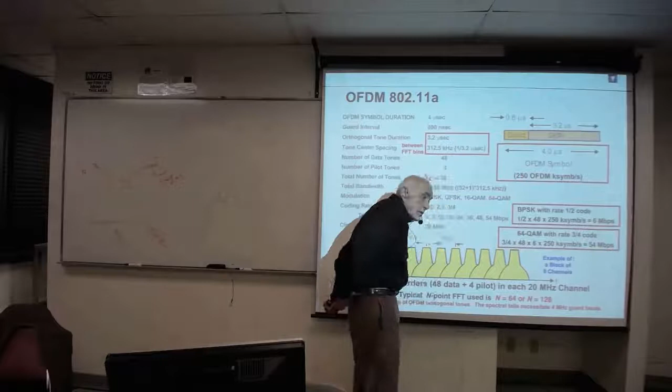So the lowest one would be where one of the modulations allowed is BPSK, and one of the code rates allowed is a code rate of 1/2. Here are the modulations allowed. Let's take this modulation and this code rate, and this is the rate of the symbol rate.

Remember that not all 52 subcarriers are carrying data, only 48 of them are carrying data. And remember it's BPSK, so it's like 48 bits that you get from here, but it's multiplied by 1/2 because these are code bits now. This is a coded system, so only 1/2 of them are data bits, and in order to get the bit rate, how many of those bits are you going to get when each bit is going off at a rate of 250 kilosymbols.

That's 250 kilosymbols per second, and the product of these three numbers gives you the 6 megabits.

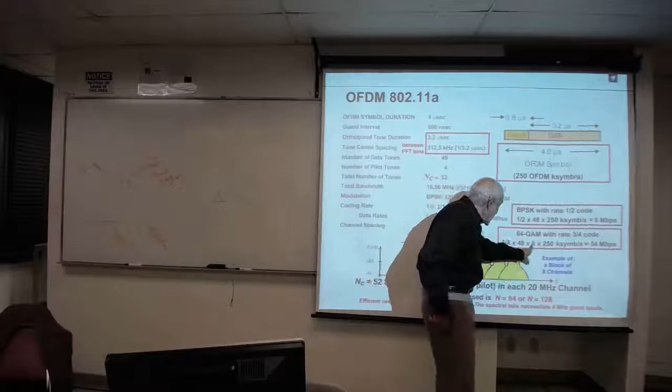To see how that changes to 54 megabits, let's take the largest modulation, 64 QAM, which provides 6 bits in every symbol. There are still 48 subcarriers, and let's take the rate of the code. Now remember what you want: you want the largest rate, because you want as little redundancy as possible, to go as fast as possible. So it's 3/4 of 48 times 6. Again, this is the symbol rate, and the product of these numbers gives you 54 megabits per second.

So again, notice in a typical example all the numbers that you have here. In fact, notice this number particularly. Well, let's just go through this.

What I've told you is worth noting, because you've got to keep this straight if you're ever going to get into the details. You have to segregate in your mind, give it a different name if you like, but mine is N sub C, the number of subcarriers. N is the transform size, which is always going to be larger than the number of subcarriers in a real system. N sub CP is the cyclic prefix samples.

N sub L, I'm calling the total of these two together. That makes for the whole OFDM symbol samples together, which is 80. And if you want to know the sample time, it's going to be the reciprocal.

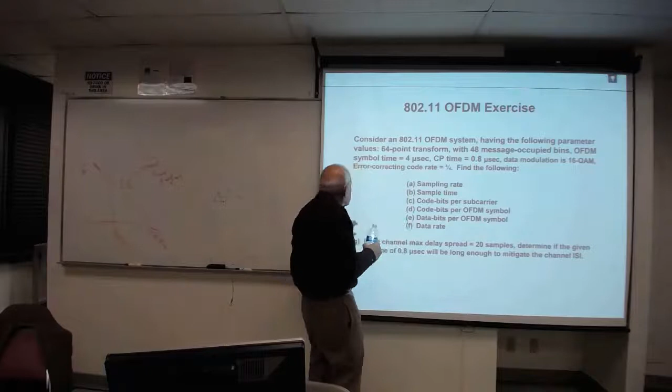In the interest of time, let's do this simple example step by step as it's called out here. Consider an 802.11 OFDM symbol system having the following parameter values: 64-point transform, that's N, with 48 message-occupied bins, OFDM symbol time 4 microseconds, 0.8 microseconds for the cyclic prefix, data modulation in this case is 16 QAM, and the error correcting code is 3/4. I want you to find the following: the sampling rate, the sample time, the code bits per subcarrier, code bits per OFDM symbol, the data bits per OFDM symbol, and the data rate. Also, if the channel maximum delay spread is 20 samples, determine if that cyclic prefix of 0.8 microsecond is long enough to mitigate the channel ISI.

So let's start off with the tone spacing. We said, this is what you have to remember, the tone spacing is the reciprocal of the time, not of the whole OFDM symbol, but of just the data portion, which is time OFDM minus the time of the cyclic prefix. We were given, basically, 4 minus 0.8, because it was the ordinary typical system we saw, and we get delta F as 312.5 kilohertz. That's true for all 802.11 cases.

Now the sample rate, in this case, again we can take the N. Let's choose 64, and with this delta F, you get a sample rate of 20 megahertz. Notice the moment you have this ability, if you wanted to, you can change to a larger transform. You can make it 128.

The moment you do that, your sample rate has just doubled. You've gone from 20 megahertz sample rate to 40 megahertz sample rate. What about the sample time? Well, it's the reciprocal of the sample rate, so in this case that's 50 nanoseconds.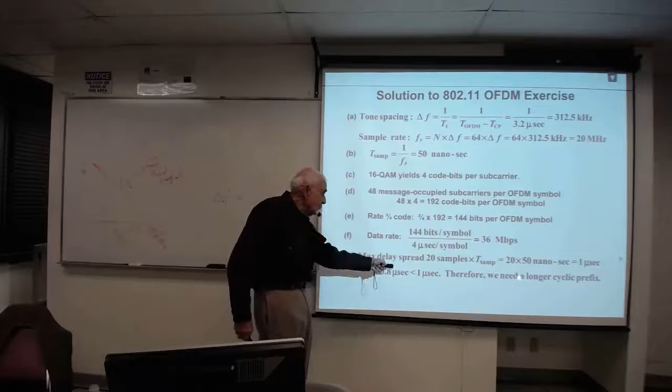Now, the maximum delay spread is 20 samples, and the sample time was 50 nanoseconds, so 20 times 50 nanoseconds is 1 microsecond. But lo and behold, the time of the cyclic prefix is less than 1 microsecond - it was 0.8 microsecond. If it's going to be useful, it must be greater than the RMS delay spread, and therefore we need a longer cyclic prefix in this case.

Okay, we talked about this case already. Let's see, if we had till 6:30...

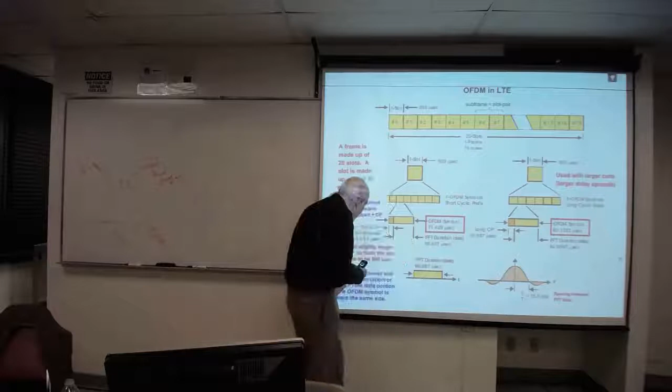And the magic of why they have such funny looking numbers: 6 out of the 7 short cyclic prefixes are this length, 4.69, and one of them is 5.21. The reason is they want this to be exactly the same in both the short and the long cases, so they basically force the slot time to be exactly 500 microseconds by a little subversion of what you'd normally expect. Normalcy might be everything being the same, but they have to make one a little different in order to keep that exactly the same in both types.

So notice what you're looking at here is basically the formation of one of these symbols. Remember, a 7-symbol slot has 7 symbols - I'm just looking at one of them, just one of these lines. And what you're seeing on this page is if I took 3 of these symbols, that's symbol 1, symbol 2, symbol 3, and you got 3/7 of an LTE slot. So there's nothing conceptually different about OFDM here - it's just different numbers because you've got a different application.

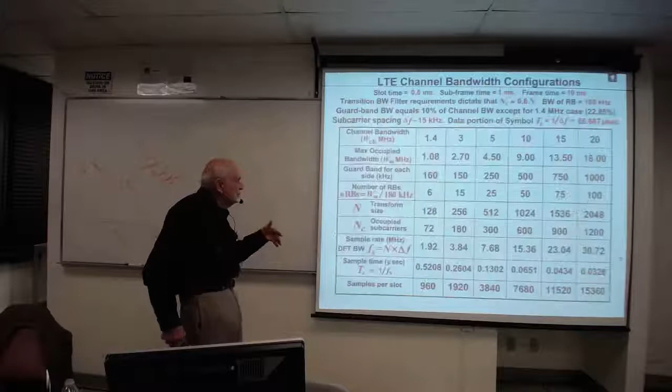And I've given you a lot of that numbering, but what I'd like to do is go to a completely different idea. And first of all, the motivation.

Okay, so on my list of questions about things we ought to know about digital communication is this question number 42.

The major part of our evening has been in answering the first part of it: why OFDM is useful for high data rate fading channels. Essentially, the answer is it turns out to be the easiest way to mitigate by getting an extremely simple equalization process, which is just multiplying by a complex number. It's just a benefit in implementation.

And what benefit does single carrier OFDM make, and why is it natural for mobile systems? So what you're going to see is that the uplink in a mobile system is generally single carrier OFDM, and the downlink from the base station is generally ordinary OFDM.

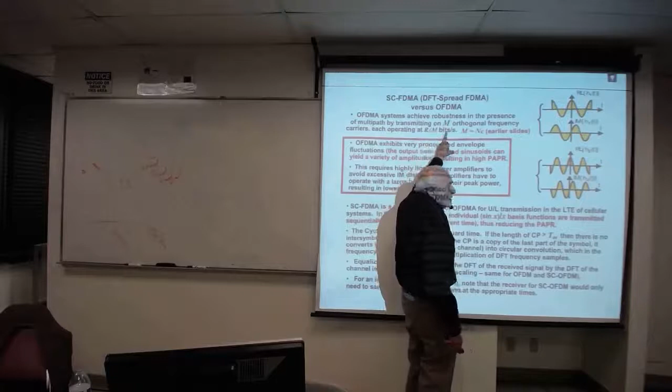So remember that when we were dealing with OFDM systems, we achieved robustness in the presence of multipath by transmitting on many different orthogonal frequency carriers, each operating, if this was M subcarriers, at 1/Mth of the total bits per second. We partitioned, and that's all we've been doing right now.

Now, OFDM exhibits very pronounced envelope fluctuations. You can almost get a sense of this: if this is the real part and the imaginary part of one symbol transmission, or one of the gated sinusoids within this summation. Just think of having multiple gated sinusoids, here's just a faster moving sinusoid, real and imaginary.

So we're looking at one OFDM symbol, and in your mind's eye, maybe there are 500 subcarriers, and you're looking through those 500 subcarriers. What you see, based upon the data, is these subcarriers, just lined up in your mind's eye, might based upon accident alone, data choice alone, add up to large amplitudes or very small amplitudes based on just the choices that you make.

Here's a little example: F sub 0 with this transmission, F sub 0 plus 15 kilohertz, that's one step away is this phase, another step away is this phase, another step away is the blue phasor. You just take those values and add them up, and you see that at one little region in time, there's going to be a null created. This is just a little example to show.

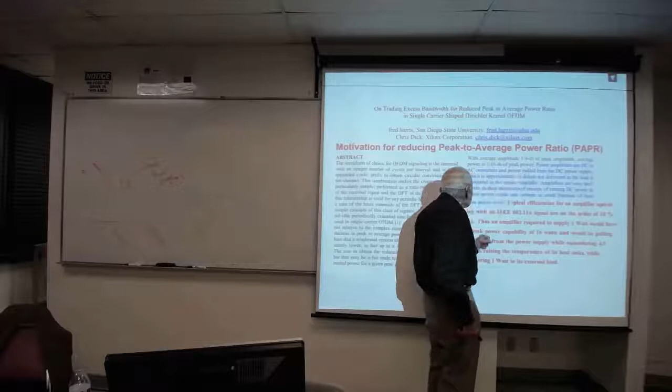So the motivation for reducing the peak to average power ratio: power amplifiers are DC to AC converters, and power pulled from the DC power supply, which is approximately constant, not delivered to the load is dissipated in the power amplifier. Amplifiers are very inefficient in their transduction process of turning DC power into signal power when they operate at small fractions of their peak power level. So backing off to be in a linear region and working at small fractions is terribly inefficient.

Let's take an example. Typical efficiencies for an amplifier operating with an IEEE 802.11a signal are on the order of 18%. Thus, an amplifier required to supply 1 watt would have a peak power capability of 16 watts and would be pulling 5.5 watts from the power supply while squandering 4.5 watts, raising the temperature of its heat sink while delivering 1 watt to an external load. Very inefficient.

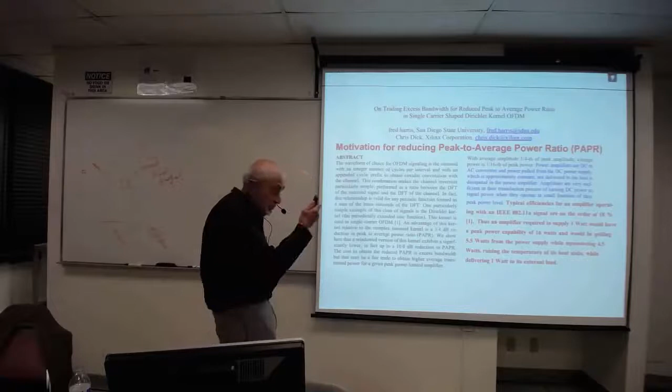So notice we asked the question, what do we mean by basis functions? A common mathematical representation of a signal is a linear combination of elementary functions called basis functions. They can be a variety of things: gated sinusoids are the gated functions in OFDM, square root Nyquist pulses, the sinc functions, which also go by the Fourier name, the Dirichlet functions, are basis functions.

So in OFDM, the basis functions in the time domain are the gated sinusoids, and in the frequency domain, that's where we allow the coefficients of our data to dictate exactly what that sinc function looks like, because those basis functions are sinc functions in the frequency domain, and in the time domain, they spit out gated sinusoids. But when we go to single carrier OFDM, it's just the opposite: the basis functions in the time domain are the sinc pulses, and in the frequency domain, they are gated sinusoids.

Okay, let's get to some pictures. So when we're talking about gated sinusoids, you see by accident of the random data alone, just by the poor choice, or just the accidental choice of data, you can have a large peak followed by nulls and a large peak to average power ratio. The moment you change to different basis functions, like staggered sinc functions, you see the addition of these things.

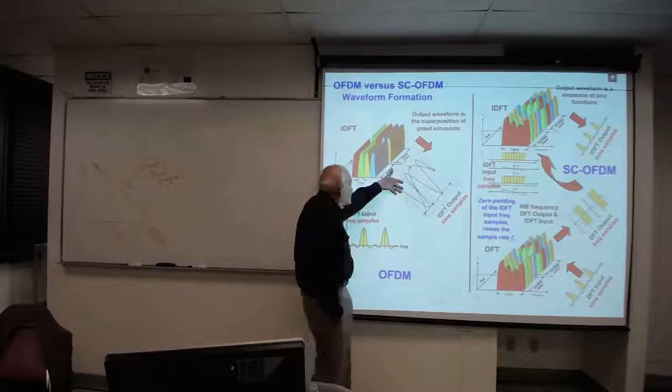I think this is a useful picture just to keep in mind the concept of how they differ. They differ because in ordinary OFDM, remember, we went in on this frequency axis with sinc functions that represented frequency information, and we came out with gated sinusoids. Now, with the single carrier OFDM, we have this extra step called a DFT.

So with this extra step called a DFT, we're also going in with sinc functions, just as we did here. But remember, the sinc functions here were in frequency, and we went into this transform picture on the frequency axis. And here, this represents time samples, not frequency. We're going in here on the time axis, and we're coming out of here with wideband simple signals.

So each one of these outputs, you can think of it as the spectral picture of a gated sinusoid, because you basically have spectral lines in frequency. This is tone 1, tone 2, tone 3, tone 4, and so forth. And you got a similar picture. The thing that really changes is the phase information. The wideband changes very little, but it's just the phase information that's making it quite different.

So this is the DFT output, which are frequency samples, and now you're going to go into this kind of a picture. This is the same inverse DFT picture that we had with ordinary OFDM, but remember we preceded it with this operation. So now our input, these are still frequency samples as they are here, but they don't look like this. They are gated sinusoids in frequency.

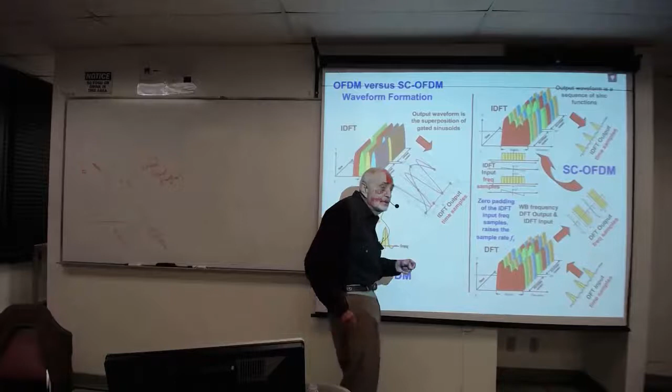And look at what comes out in time: our time samples out. And the beauty of this is that the time samples that come out are the same as the time samples that started off at the transmitter. Remember we said that we can never take the output of these sample points and sample them and get the original data. But we can here. These time samples are the same, forgiving us for errors, there'll be some errors, but essentially the same as these time samples. So just sampling it will give you the output.

Okay, so another picture that I find useful is the same frequency plot for DFT and IFFT. With the single carrier, I'm just showing it to you simplified with one picture, starting here. So you start here with input time samples going into the time axis and coming out with gated sinusoids in frequency, wideband signals having different magnitudes and phases, magnitude 1, magnitude 2, and so forth.

And then turning around and taking that frequency information back into here and coming out with the time samples, which are sinc functions. So just conceptually, I think that can be a shortcut. Either one of those two slides can be a shortcut to keeping in mind the difference between what you're doing here.

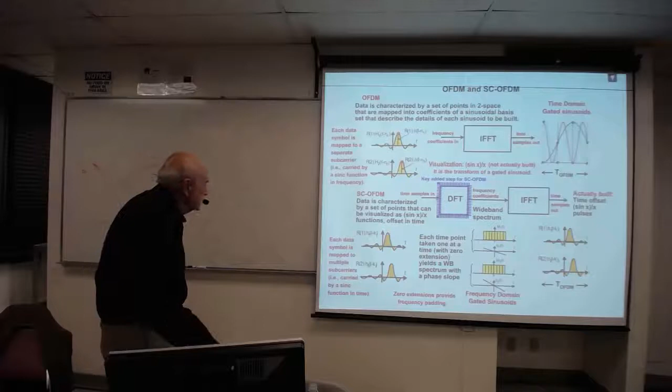This too shows you the same picture, that this is OFDM on top, where you're coming in with the sinc functions that represent the coefficient information that's going to dictate what sinusoids get built. They get built here and put out as gated sinusoids, the superposition of which make for the output samples here.

While in the case of single carrier OFDM, where this is the added step, the DFT, you're coming in, look, the same kind of a function, but here it was in frequency, here it is in time. You're putting in time samples, going through a DFT that turns time samples into frequency information. Again, you've got magnitude, bandwidth, and phase information, everything you need to know about those superimposed samples.

And now you go into the same IFFT with frequency information, but not this frequency information, this wideband frequency information, and out come the narrow impulses, wideband in, narrow out, comes the time samples, and they're staggered sinc functions, again, precluding the high peak to average power ratio. And let me just do one.

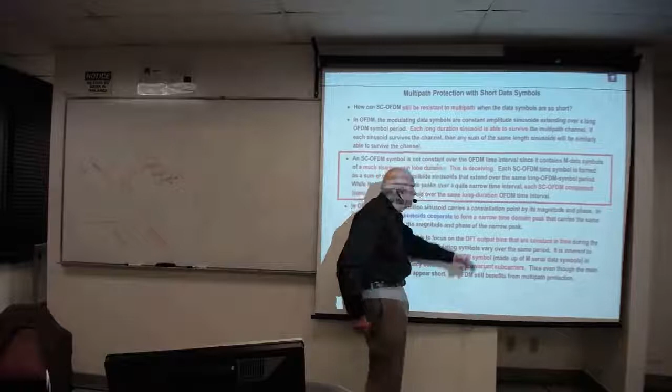A single carrier OFDM symbol is not constant over the OFDM. Let me read it here again. In single carrier, this slide says the same thing, but it's simpler here.

In single carrier OFDM, the narrow sinc function main lobes are misleading. I'll tell you why. Remember how we started off by saying the magic of OFDM is getting long symbols, long symbols, long symbols? And suddenly this has got all of the attributes of OFDM. It's a variant of OFDM. It seems to the observer that it's got short symbols. Short symbol, where are the long symbols? That's an important thing to keep in mind here.

This is misleading. They appear to have short symbols, giving the impression that short symbols are sent. But just like OFDM sends the superposition of long-gated sinusoids, here too the single carrier OFDM sends the superposition of long ones. You don't appreciate that they're still long, and they are cooperating with each other to peak up at staggered times. So I think we've covered the essence. I didn't imagine I would be able to do it, but I think I covered the essence.

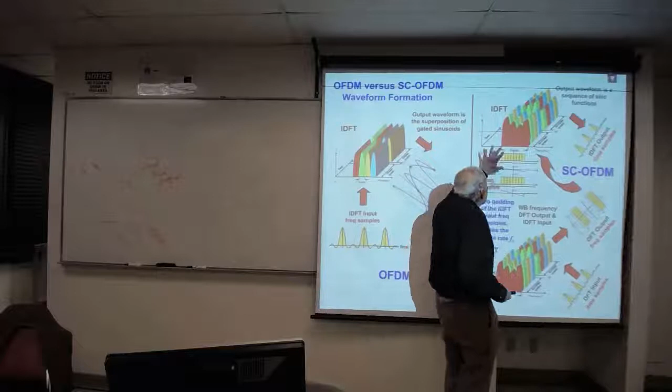Oh, there is one other thing I'd like to show you in these slides. Is there another way for implementing a single carrier OFDM transmitter? Why bother with DFTs and IFFTs when we just end up with samples of data carried by sinc functions? So the question came up by looking at this picture, asking why bother with all these transforms, DFT, inverse DFT, when I just wind up with exactly the same thing here? Isn't there a simpler way of doing it? And the answer is yes, but.

Can we design a single carrier OFDM transmitter with just a sampler and a raised cosine shape? The answer is yes, but. Here's the suggestion: you take a data waveform and sample it, getting N sub C data samples for those N sub C subcarriers. You multiply it by an N-point sampling sinc function—this is a digital RC filter. The output comes out as samples of the sinc function. No transform, no Fourier transform, no inverse Fourier transform, because when you get it at the receiver, you sample it.

So the question is, it looks easy, doesn't it? Two problems. The circuit performs multiply, accumulate, or convolution—linear, not circular—causing loss of orthogonality. But we can handle that; that's not the main problem. Here's the main problem: there is an excessive number of multiply operations. Would you have believed that all of this simply came about because it is the easier way to implement it? If you count the multiply operations done this way, they can be extraordinary.

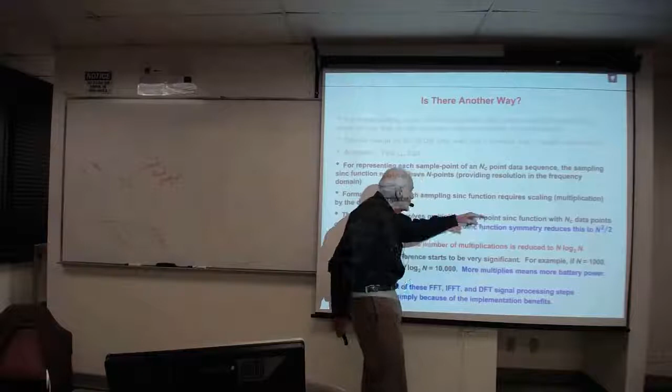Let's take an example. For representing each sample point of an N sub C point data sequence, the sampling sinc function needs n points providing resolution in the frequency domain, and formation of each such sampling sinc function requires scaling or multiplication by the data. So the computation involves multiplying n-point sinc functions with N sub C data points—call it approximately n squared. N sub C is a little less than n, but just call it n squared multiplications. Sinc function symmetry, since the right hand and left hand are the same, reduces that to one half of n squared. By using transforms, the number of multiplications is reduced to n log base 2 of n. Notice that for n much greater than 16, the difference starts to be extremely significant. For example, if n equals 1,000, n squared over 2 is 500,000, but n log 2 of n is about 10,000.

So more multiplies means more battery power. It's not just a matter of somebody scribbling down more numbers—it means more operations, more battery power. Therefore, all of these signal processing steps came about simply because of the implementation benefits. Looking at this closely was a surprise to me.